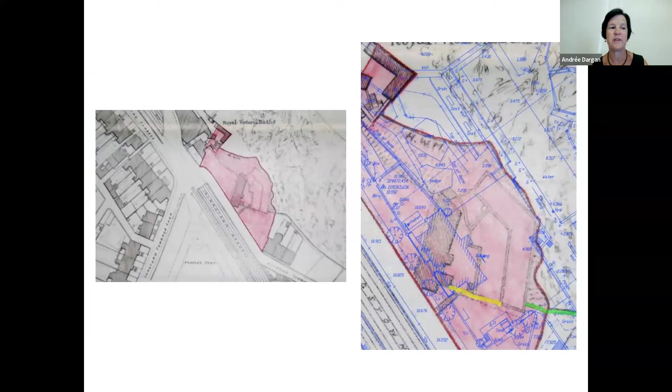This is an image of the earlier pool. Then in 1896, Kingstown Urban District Council purchased the current bath site, and the new baths were built and formally opened in 1908. They include state-of-the-art facilities for sea bathing, a gentleman's swimming pond and a separate ladies' swimming bath.

Both with showers, and for the ladies furnished dressing boxes. Over £11,000 was invested by the Urban District Council. The intention was that the baths were both recreational and very practical.

In an era when bathrooms were not the norm in housing, especially true in Dún Laoghaire in the 1900s, where obvious affluence hid great poverty, to coincide with the renaming of the town, the baths were renamed the Dún Laoghaire Baths in 1920.

This 1933 photo shows the baths in their heyday with Lido-style architecture. And indeed, the 1930s was considered to be the golden age of Lido-style facilities.

The Dún Laoghaire Baths was advertised as being a full spa treatment resort, as well as having of course swimming, attractions and a tea room. But the working year was short, from Whitsunday weekend to the end of September.

Throughout the decades, generations of children and adults enjoyed the facilities. You can see the little bandstand in these historical postcards, and we have rebuilt this as part of our scheme.

By the mid-1980s, however, the popularity of open-air baths was declining, frequently attributed to the provision of indoor swimming facilities by local authorities and the increased availability of affordable foreign holidays. The Rainbow Rapid slides were added to the baths in 1985 to attract the younger generation. While initially hugely popular, the length of the season and the cost of upkeep proved too much, and eventually they closed to the public in 1997.

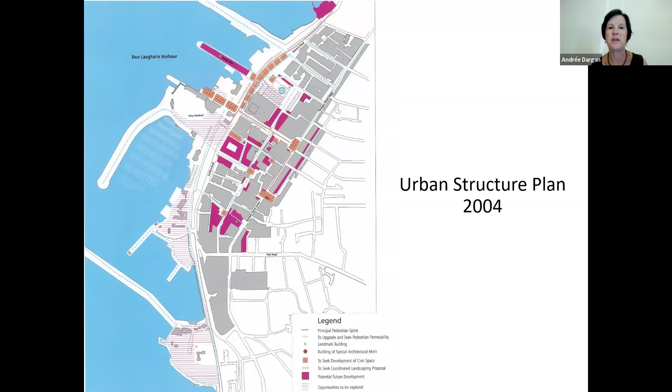Then we incorporated further urban framework plans in 2010, 2016 and 2022. The current urban framework plan has three themes: reconnecting the town with the waterfront, placemaking and creating vitality, and strengthening links with the adjoining areas.

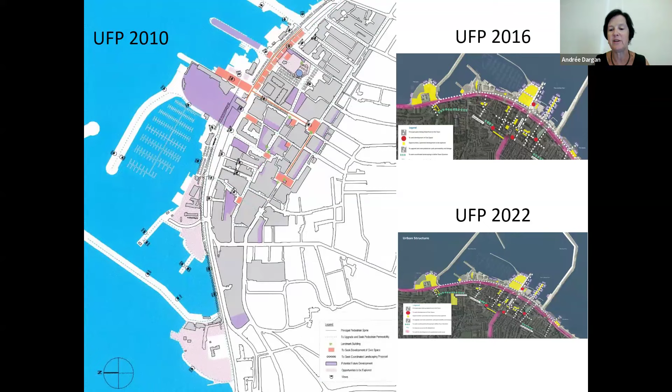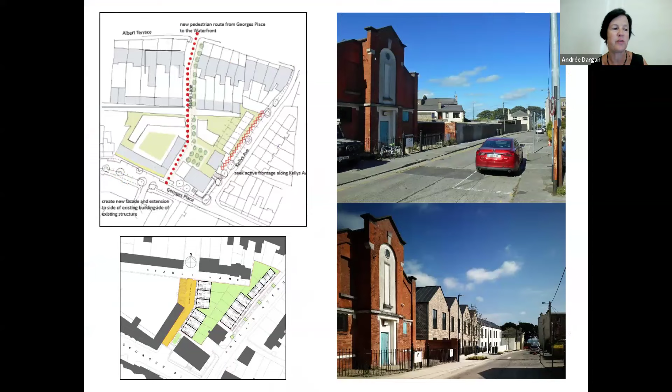Some examples of these: this little example of George's Place, using an infill social housing scheme to regenerate one street and create a new street, thus reconnecting the town centre with the waterfront.

This is our Metals project for placemaking and creating vitality, where we covered over the railway cutting and it has become a place for promenading, for sitting, for dining, for playing.

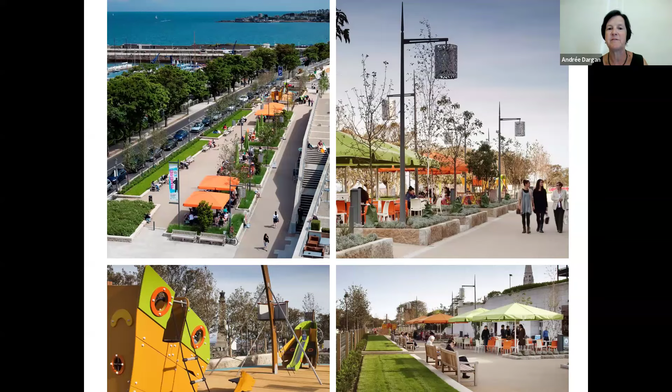This is our coastal mobility route for strengthening links with adjoining areas. It's a 4.5 kilometre coastal walking and cycling route where we upgraded villages along the route.

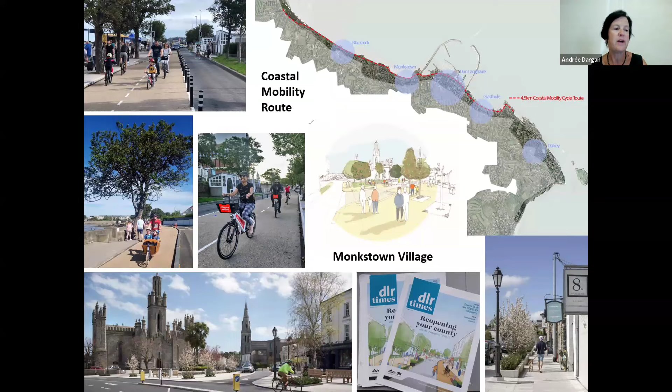Much of this work was done during COVID, and some of these temporary works are now being rebuilt as permanent schemes. Whether our interventions in Dún Laoghaire are small or large, whether the refurbishments are new, temporary or permanent, we follow the same guiding principles set out all those years ago.

So the redevelopment of the Baths site is a further core part of our strategy of linking the town centre to the seafront by way of upgrading public realm to a very high standard, and it's another step in our implementation of our overall vision for the town. This was recognised by the award of Dún Laoghaire as the Great Town 2022 by the Academy of Urbanism.

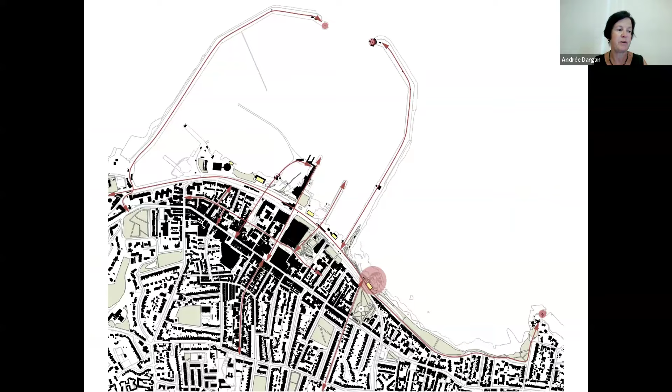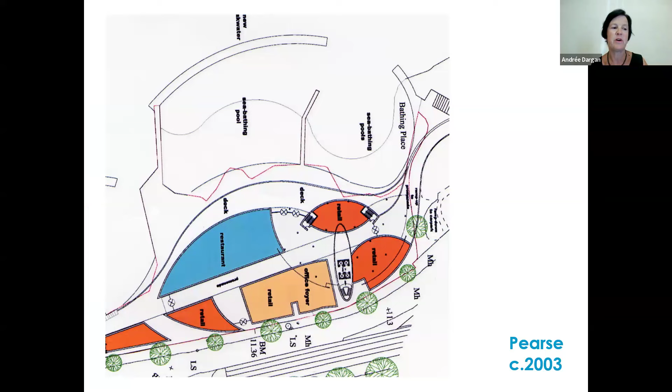Following their closure, the buildings on the entire site of the Baths fell into disrepair. The site is very exposed and regularly takes a beating from the sea. Over the intervening years, numerous plans were put forward for the site's redevelopment in various forms, including public-private partnerships, an early architectural ideas competition, and a scheme in 2003.

From the outset, however, local feelings ran very high, and by 2001 a heritage and renewal group had formed with the aim of restoring the Baths and keeping the site in public ownership. This group later grew into SOS, Save Our Seafront.

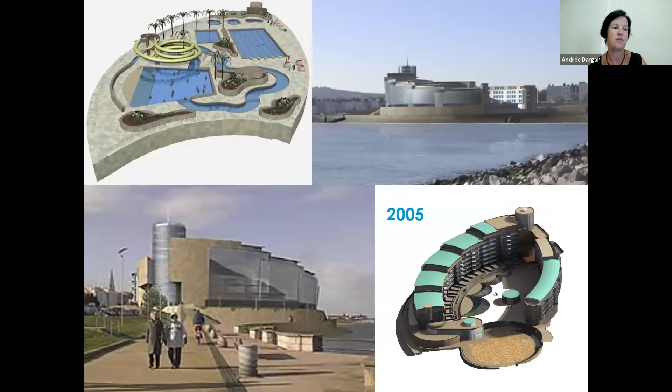Then in 2005, the council introduced a controversial £140 million proposal involving partial privatisation with an over 8-storey complex comprising residential, shops, restaurants and maritime leisure facilities.

This spurred various interested focus groups into action, and a number of protests were arranged that summer. These culminated in an exceptionally large protest with up to 4,000 attending and a march past the Baths. In the face of overwhelming popular pressure, the proposal was dropped.

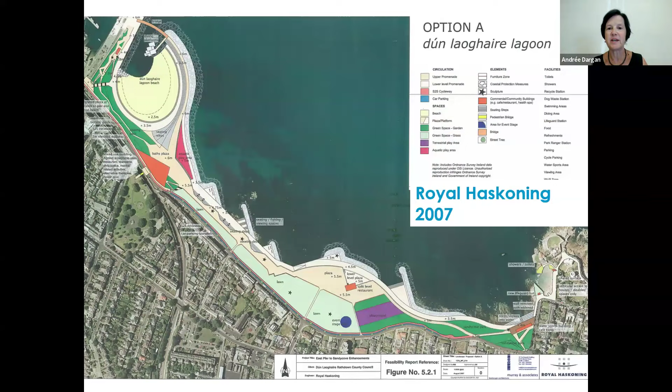Further initiatives then followed in 2007 and also in 2010. All of these unsuccessful initiatives led to the formation of the Baths Subcommittee in 2010, which was a cross-party group of local elected councillors, and they set down a framework for any redevelopment of the Bath that should have regard to.

As a result, the design commenced in our department, DLR Architects, with Bob as the project architect. Our aim was to take the brief from the Bath Subcommittee and give it physical form by designing a sensitive scheme that was at the same time of high design quality. As architects, we have the opportunity to make an impact on the landscape and create the built environment of the future. We are honoured as local authority architects to make our mark, and also to facilitate private architects making their mark on the public realm for generations to come. We appreciate the responsibility this brings, and we hope this project has done justice to it.

Taking on board the subcommittee's recommendations, our development strategy for the site was to provide for continuing public use of the area by securing the Baths Pavilion itself and providing activities that would give new life, removing the dilapidated structures to permit the creation of new routes with landscaping to connect the walkway at Newtownsmith, which leads to Sandycove in the south, to both the East Pier and the People's Park, and creating enhanced facilities for swimming and access to the water edge.

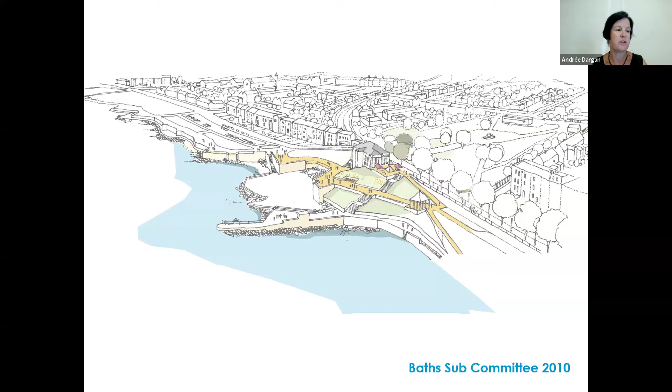We conducted public consultations, environmental impact assessments, and had to regularise a historic title with the foreshore application. Ultimately, in 2015, we received planning approval for our scheme. We're on site completing additional pathways that were referenced earlier, accessibility routes, and we have further plans to connect this area over as far as the East Pier, but that's for the future.

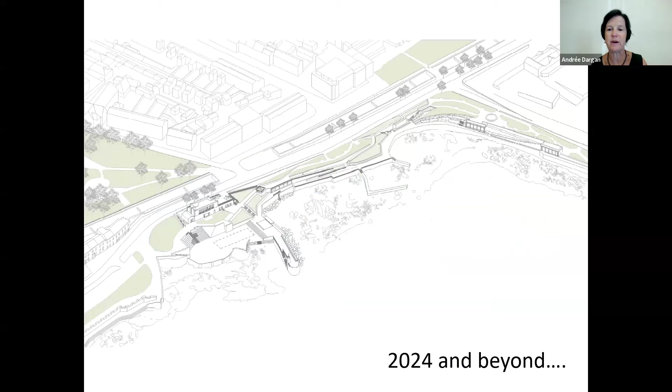For now, we're delighted that this spectacular new addition to the coastline is open, with access to outdoor public spaces having taken on a whole new significance in recent years for us all. It's wonderful that this breathtaking space is now accessible for everyone.

Sarah will now take you through the next part of the presentation.

This next section of the presentation is the sandwich in between the explanation Andrée gave for the starting context and history of the project, how it's set within Dún Laoghaire-Rathdown, and then the actual built construction of the design that Peter will move forward with. This mid-section, as Andrée described, took us over 6 years from the Bath subcommittee in 2010 all the way up to the design team.

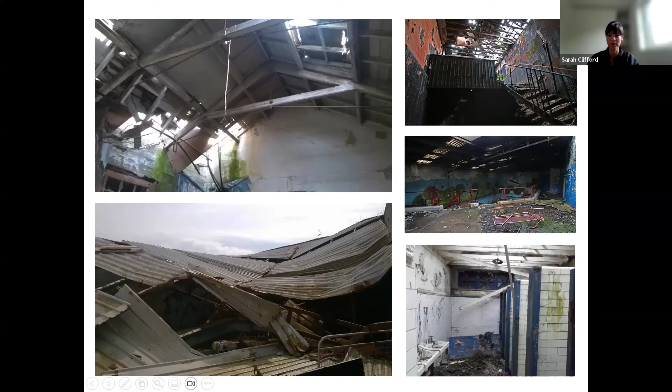Inside views of the pavilion itself, the top left is the washroom, and then all of these other photographs show the main pavilion, and then the little area, the back rooms to the rear.

So as Andrée mentioned, the subcommittee had three main points that we needed to work with. There was the retention of the existing pavilion building here, and the smaller outbuilding, the wash house to the right.

The rest of the existing buildings were demolished. They were all of a later date. The pavilion itself was to have gallery, artist studios, and a cafe.

And the original baths entrance was to be retained and made into an access for the pavilion building itself. An outdoor terrace was to be created so that people could relax and enjoy the views that were now created from the whole new facility.

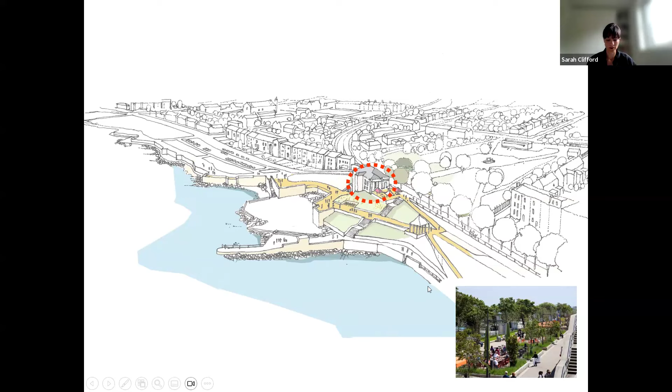The connection of the walk along Newtownsmith finally connecting to the East Pier, and you can see that this follows the line of the mid-level all the way from Newtownsmith through the bandstand and up along to the East Pier.

So again, the walkway, as it meanders through the site, reflects the outline of the shore as was existing, and also the line of the old battery that was there and removed.

Then there was a creation of facilities for swimming. The new jetty was required to take swimmers further into the sea and away from the rocky shoreline.

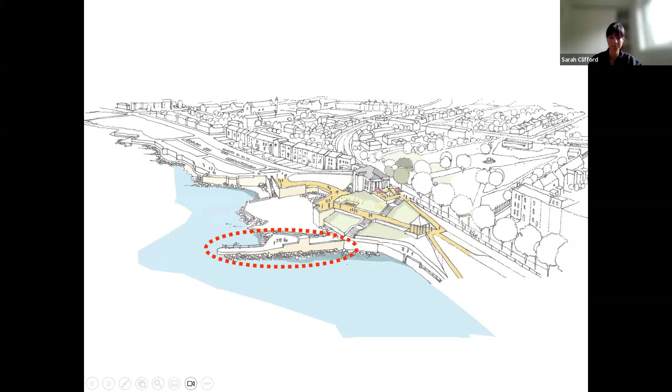And then also the connection of the steps. These are the main steps that lead you down all the way from People's Park, and the crossing over the road down through the site, traversing all of the levels and onto the jetty.

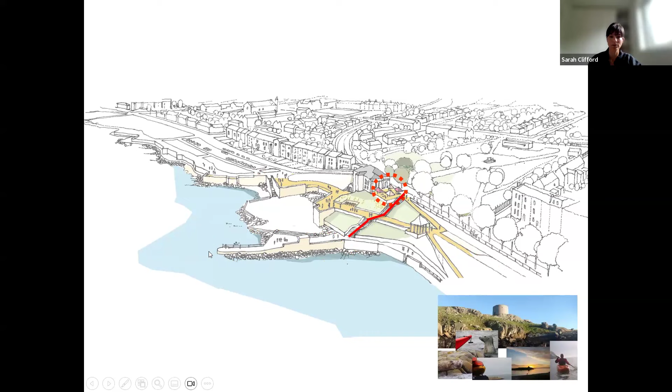And then again, the decision was made that the Casement statue would be placed at the end of the jetty in the most prominent position.

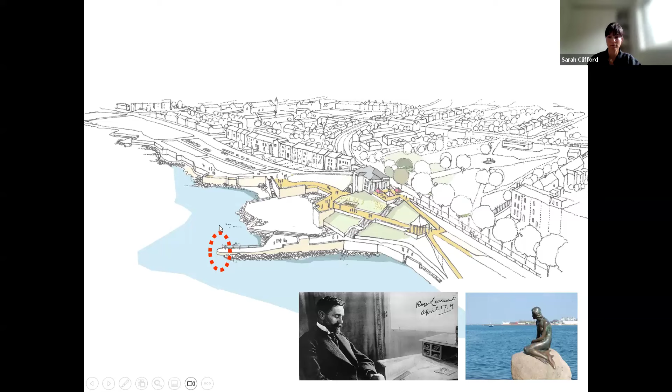So in 2016, the Memorials Committee approved the erection of a statue to commemorate Roger Casement. The design for this, or the procurement for this, went over two phases.

So there was initial expressions of interest, and then after that they decided which artist was the most preferred, and a shortlist was created. Visual Artists of Ireland were engaged to manage the process.

The statue itself is 1.5 life size and about 3 meters tall from the base of the left heel to the top of his head.

You'll be able to see wherever he is on the site at the end of the jetty. The relationship changes depending on which level you're actually at, from the top level to the mid-level to the lower level, and his connection with horizon and the shore.

So these further three sketches are ones that formed part of our planning process. This is a view north from Newtownsmith going along the mid-level of the walkway. There's the main pavilion there in the background and the wash house to the left.

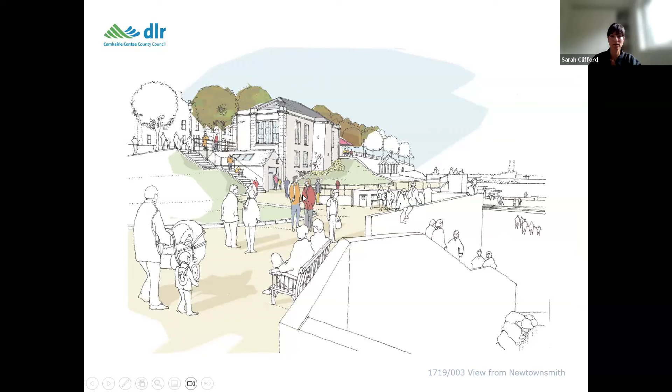This is from the bandstand looking south. So again, you can see the main pavilion building, the original piece of sloped ground, taking the main walkway through in front of the pavilion itself to the rear.

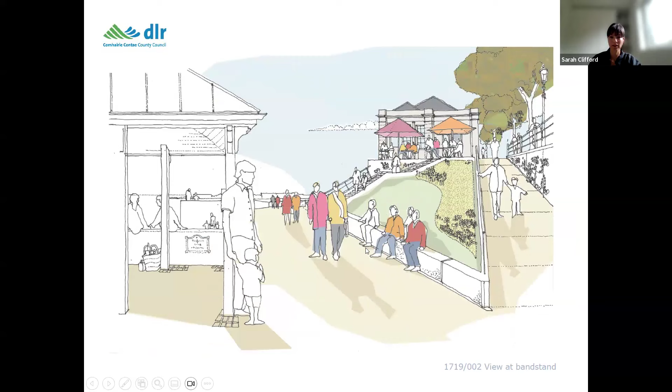And then the view that we have from the new jetty looking back towards the pavilion building and the terrace for people to sit and enjoy the relationship and connection that we have with the lighthouse to the East Pier and the Martello Tower in Sandycove.

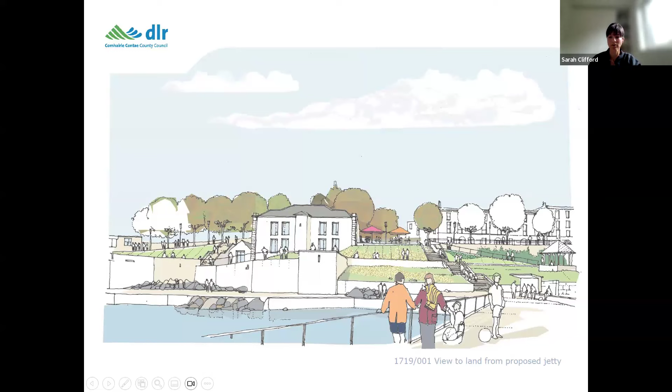So moving on from this, at this stage in 2016, we then engaged the design team to come on board with us and collaborate in terms of moving forward onto design and final construction. So at this point, I'm going to hand over to Peter.

You just need to unmute yourself, Peter. Perfect. Can everyone hear me now? Yes. Sorry about that. Thank you, Christina.

Thank you, Andrée and Sarah, for the presentation so far. This is such an honor to be talking to this audience, and I want to thank Manon, Christina, Emily, Ashi, and indeed Günther for inviting us here. I also want to thank my own team, Aidan, Risa, and my whole office, and indeed the Clerk of Works that we've been working with, Connor Geraghty, Fiona Roach in particular, and indeed Andrew or Aidan and many others, including Ivar, and indeed Bob. There's so many people to thank.

But I want to just note one thing. Lisa Godson's text was absolutely breathtaking, and we were so pleased to read her text. And I also want to thank the photographers whose work you will see, because it's a further translation of our work.

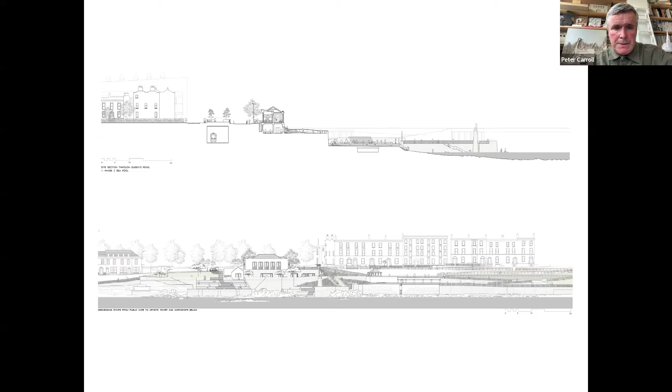So we chose not to make plans. We kind of eschewed plans very quickly in favor of making models. A lot of this was generated by perspective and perspectival study. And in many ways, it came from Bob's and ours and Sarah's and André's interaction with the site, trying to ensure that this was as connective and as permeable as possible.

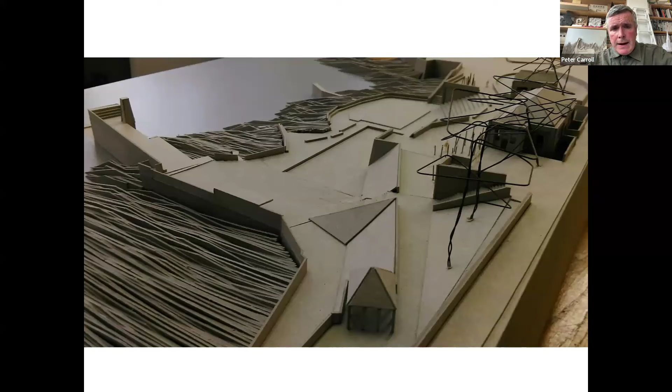As Sarah noted, we tried to retain as much of, and rehabilitate as much of, the fabric of the existing baths as possible, while at the same time introducing new elements that would marry and connect with the rest of the fabric.

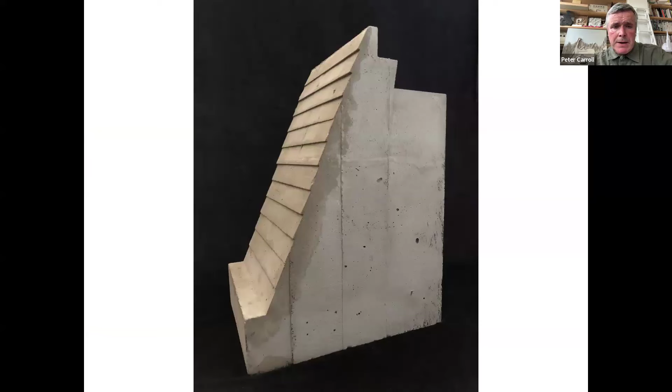Going from site models through to detailed models, this was a beast of a concrete model that we made, where we were looking at the faceting and armadillo-esque quality to the concrete scaling of the walls, originally as day pours, and trying to work delicacies into something quite robust, like seats at the top. So you'll see a profile given to the seats, and in many ways, every aspect of this project is shaped by life and wanting to ensure that people would engage with it, right through from the old age pensioner through to a skateboarder or to a child who might want to sit on a low level seat.

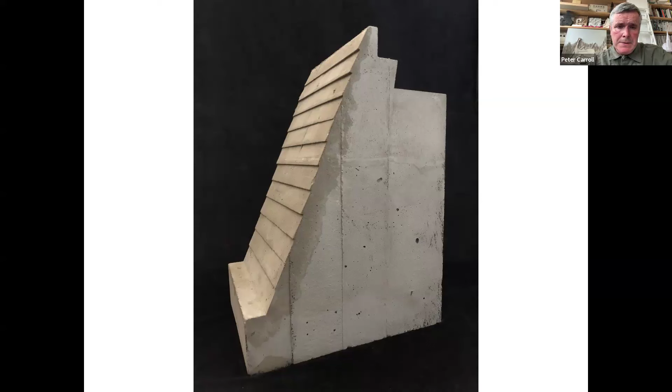As I said, once we started to uncover this project and try to retain as much as we could, we worked as conservation architects as much as architects on this project.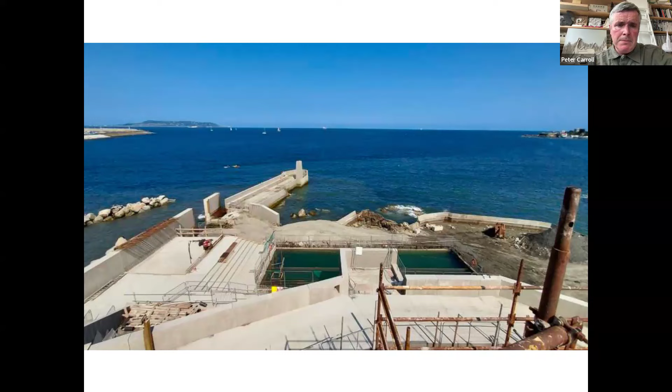And at times we kind of knew we had, I think, just met our goal in setting out measures, trying to find the right measure for the site and the materiality and the colouring of the project. And it's our intent, hopefully, to uncap this pool at a later point, if possible.

So the materiality, getting right down into the granularity and cellular structure of the baths, we used the Dalkey granite in the aggregate, very much in respect to all of the construction in the area. And you'll see that kind of bright white granite stone. We also used a 60% GGBS in the concrete in order to lighten its carbon footprint.

And we retarded the surface in order to open up the face of the concrete, to allow for the growth of algae and lichen on the concrete that would come in contact with the ground. It also gives it this very nice warm texture. A lot of people are quite surprised to hear that it's all concrete in many ways.

But we think that's quite a beautiful thing. Referring to Günther's very beautiful comments to us, noting water, gravel and cement as being the constituents of this, we very much agree.

The other way in which we treated the concrete was to polish it and to ensure a slip resistance. This is an external polish to the concrete, and you can see exposed stones, both limestone and granite. There's a grading and a variation of granite through the site from inside to outside.

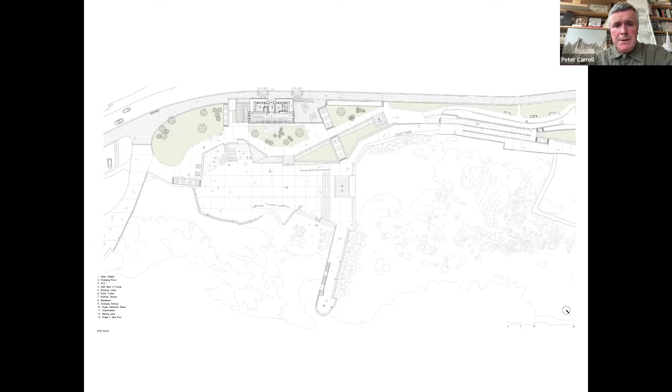So in many ways, the project was quite quiet. The design was not intent on being the main stakeholder. It was meant to be laconic and background, almost setting the stage for the life that occurs in the space. So just bringing you through a very quick derive through the project and the theatre of Queen's Road.

I particularly like this moment on the site, along Queen's Road, where it's very tight and very controlled, and in some ways it's like the curtains to the stage. Once you're beyond that first layer, that first filter, one comes to the intermediate level and looks down onto the theatre of the space down below.

And I think it's very much some kind of space that will settle into the psyche of not just Dún Laoghaire, but of Dublin City.